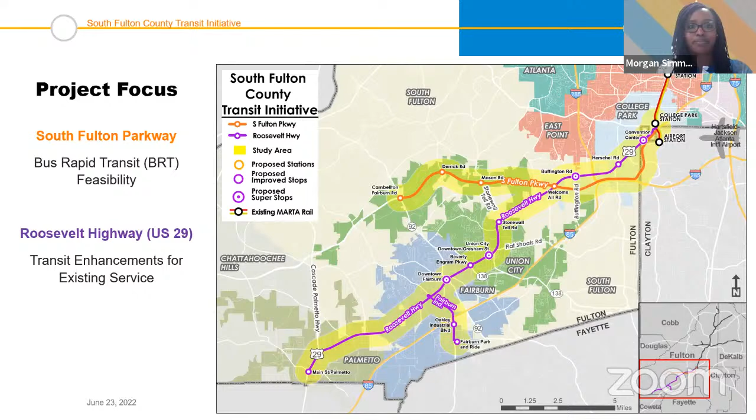So to talk to you a little bit about how did we get here, these two corridors have been discussion points for several years now. Prior to 2018, it was discussed in the Fulton County Comprehensive Plan. It was identified by GDOT with an access management study that they completed that looked into issues and concerns along that corridor, as well as in a lot of local LCI and studies at the city level, where either one of the corridors are identified for transit opportunities and transit needs.

It wasn't until 2018 the Fulton County Transit Master Plan was adopted that identified Roosevelt Highway as well as South Fulton Parkway for high capacity transit needs. In 2020, the Southern Fulton Comprehensive Transportation Plan identified both of those corridors as smart, livable, economic corridors that are vital to the Southern Fulton County area.

And last, but definitely not least, in 2020, the 15th Amendment was passed. And with the 15th Amendment, it directed MARTA to look at South Fulton Parkway for transit opportunities that could address needs. However, it was due to an excessive amount of feedback from our local government partners that allowed us to be able to add Roosevelt Highway to the project as well.

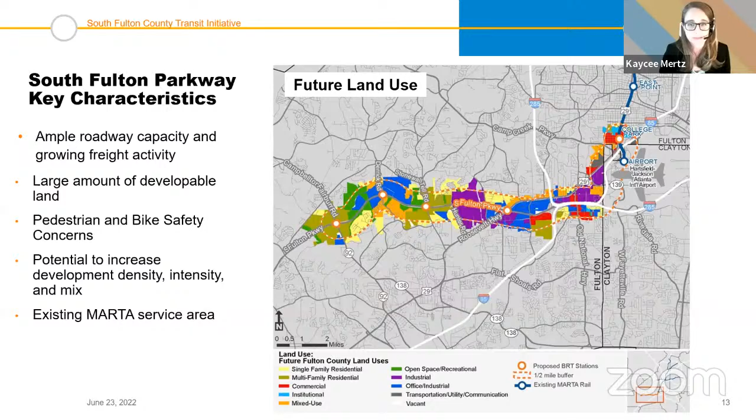And of course, we're also looking at the existing transit service that's on the corridor today. So on South Fulton Parkway, we have Route 82 that traverses the Parkway from Campbellton Fairburn Road all the way up to College Park Station, where it ties into the heavy rail network. And it does that by connecting via Camp Creek Parkway. So you can see the map on the screen here.

One of the things that we did in our existing conditions work is we dug into some of MARTA's onboard transit surveys. So we got a little bit of a feel for the people who are using Route 82 today, where they're going and how they're using it. A vast majority of the people using this route are using it pretty regularly, about 5 days a week, and they're using it to get to work. And they're also using this as their primary mode of transportation to get to work. So if they didn't have Route 82, they wouldn't have a way to get to work. So that's pretty important. And that's our audience, and those are the customers that we're working for on this project.

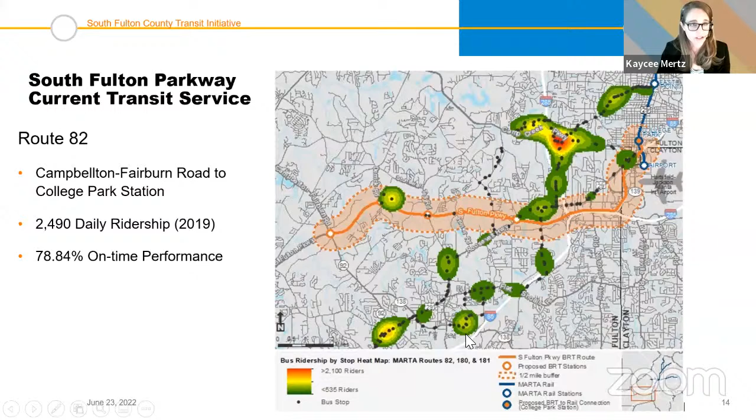But we know that a lot of the recent growth and a lot of the new growth that's coming down the pike is happening on that central and even on the further west part of the corridor. So these are things that we're taking into consideration. Also, as we've been talking with cities and other jurisdiction representatives and stakeholders, they've been giving us some information about what types of developments are coming in the future. So that's all playing a part in our information collecting as well.

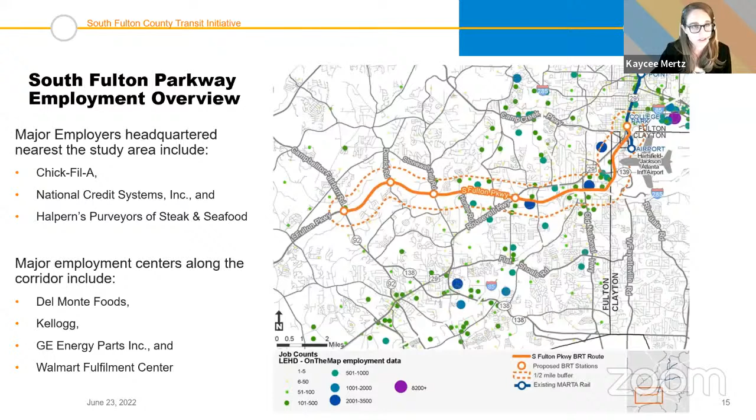So by comparison, bus rapid transit typically has stops that are spaced further apart and a fewer number of stops than local bus service. It's serving longer distance trips. It typically has greater frequencies, so the buses come more often. And because of the fewer stops, it has faster travel time from end to end. And it also uses buses that have a higher capacity, so it's carrying more people at a higher speed.

And then also the stops are designed to feel more like stations rather than bus stops. So there's a greater number of amenities there, larger spaces for sitting, larger sheltered spaces than a typical bus stop, and additional amenities that typical bus stops don't have. So perhaps bike parking, real-time signage, wayfinding signage and information, and even ticketing machines in some places.

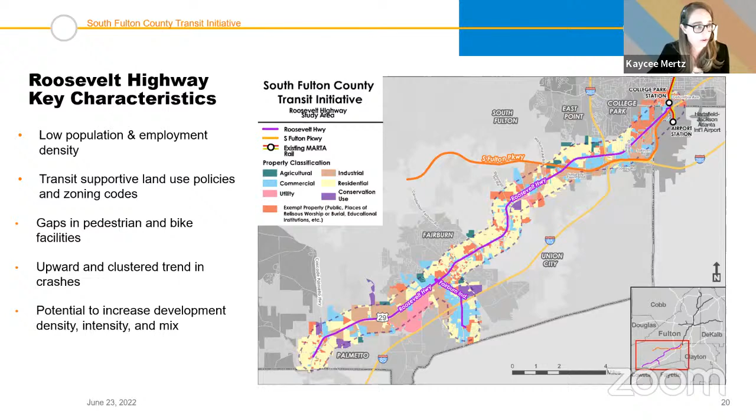And so for both the Parkway and Roosevelt Highway, we have a really good opportunity to coordinate the future land use plans that all of these jurisdictions have put together with MARTA's future transit plans and come up with a really positive future for South Fulton County.

All right. So Route 180 is the local bus route that runs along Roosevelt Highway. It extends from Palmetto on the southern end of the corridor up to College Park Station, so it has good connectivity into the rail system, and it connects to several other key local routes along the way.

So on Roosevelt Highway, Morgan mentioned early on what we're looking at on each of these two corridors, and how on South Fulton Parkway, we're evaluating BRT as a long-term solution for the corridor. On Roosevelt Highway, we're looking at something much more near term. So when she showed you that schedule of the two projects, we're looking at Roosevelt going to construction in the next few years. And so for these transit enhancements, it's really important for us to take a slightly different focus than what we're looking at on the Parkway.

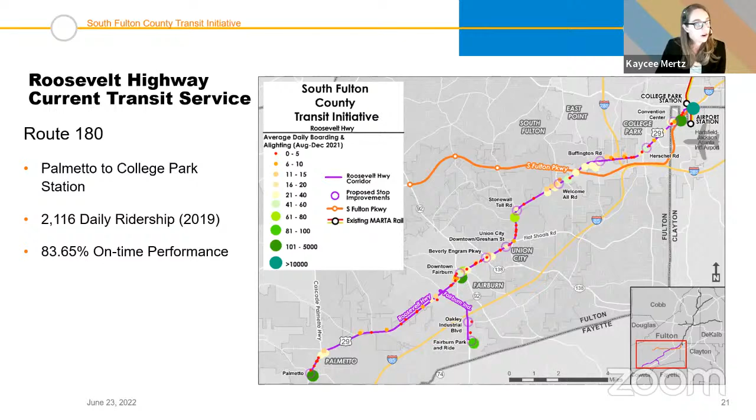Sorry, let me move that forward. You guys didn't see this slide when I was talking about it. My apologies. All right, we're advancing them now.

Okay. So these are the stop locations that we're looking at on Roosevelt Highway. We're looking at both the improved stops and the super stops. So those are two different levels of bus stop enhancements. The improved stops have improved shelters, seating area, potentially bike parking, and good vertical bus markers for the operators to see. The super stops, by comparison, have a larger footprint and additional amenities. So these are where we might see ticket vending machines, real-time arrival signage, level boarding, solid ADA accessible ramps, and other amenities that make it more accessible for people with disabilities.

And so on the map on the right side of your screen, you'll see where we have started considering where these improved stops and super stops might be located. This is still under consideration. So like I said, we're just wrapping up our existing conditions phase, and this is the phase that we're starting now. So this is what we'll be working on over the next several months. And the next time we come back to you all with a project update, we'll have more of this information available for you to review and to weigh in on.

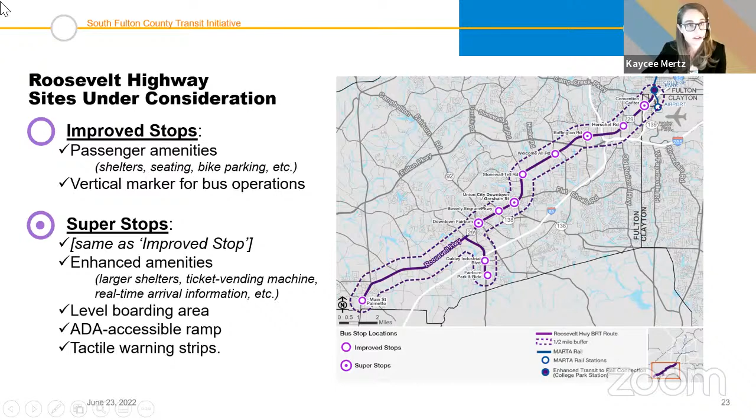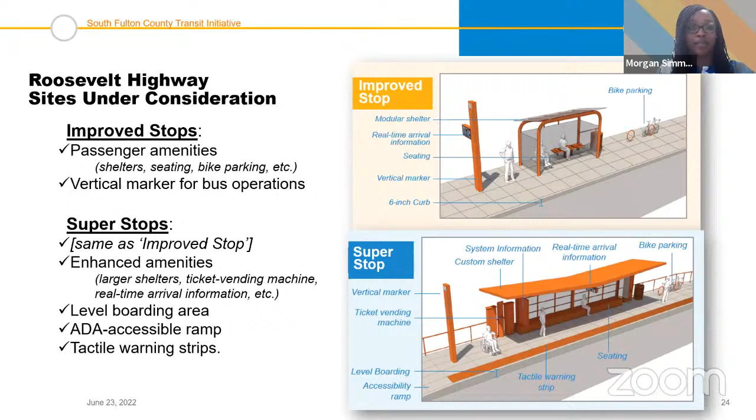Local bus service is typically what you see on most MARTA routes. It's a lower level of frequency. Your buses are accommodating 50 to 100 riders per hour. And that's simpler to implement, lower cost, and lower amount of time to complete. Bus rapid transit is really a higher level, a higher capacity transit option.

It's somewhere between your local bus service and a rail service. So it is generally, we call it, bus that operates and feels more like rail. So it's going to have a higher level of frequency. Buses come more often, longer span of service, larger capacity vehicles.

And the stops are really designed more like stations, like we were talking about earlier, and they're usually spaced further apart. So as a part of this planning effort, we really are taking a close look at where these stations are most warranted based on transit demand, future development, and our current riders. And of course, along with all of those added benefits comes a higher cost than your local bus service and a longer time to implement.

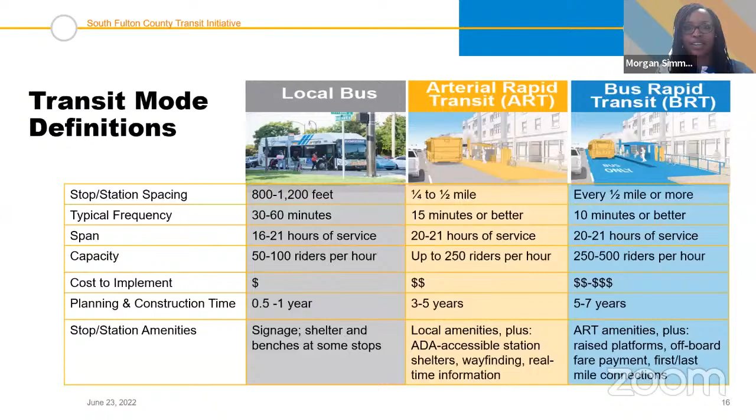Will improvements at the bus stops include sidewalks? So during the current phase of this project, staff has assessed the pedestrian facilities near proposed stops and stations and have identified many sidewalk gaps and just a lot of broken connectivity.

And this is going to require us to be working very closely with our local government partners in order to collectively address as much as possible the safety and connectivity issues that we're seeing at these proposed locations. And that will include not only efforts with this particular project, but also efforts that are being done locally for sidewalk improvements.

All right, next question. Let's see, this is my 10th question, looks like.

How are we working with local businesses to gain input from the public? Okay, really good question. During this initial engagement, we have met and presented to interested local stakeholder organizations, as well as distributed public meeting information to many of our warehouse distribution locations. A large part of this engagement effort is to identify new stakeholders to educate and include throughout this process.

Staff is continuously looking and asking for any and all interested organizations to participate. As a matter of fact, if you are one of those businesses that would like to be included in this effort and continuously receive information and feedback, feel free to drop your business name in the chat, and we'll be happy to make sure that we're keeping you up to date and including you.